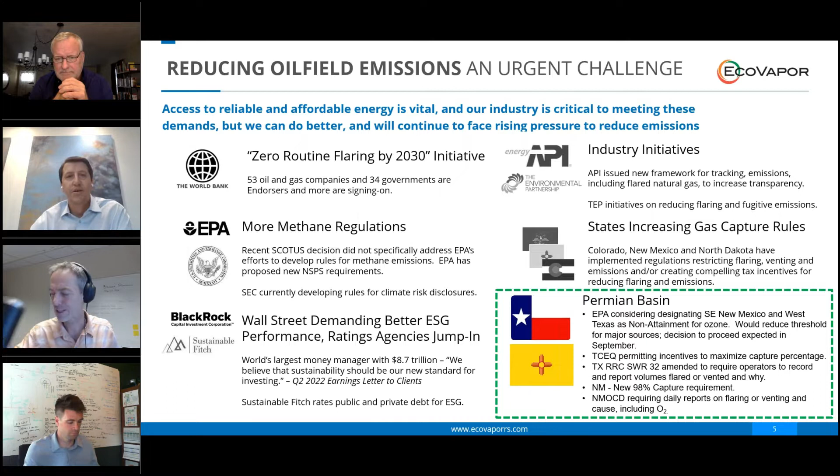So, before we jump into some of the more meaningful content today, just wanted to give a quick intro on who EcoVapor is in case some of you are new to us and what we do. As people are familiar with, the production process contributes a large source of our industry's emissions footprint, and that's really where EcoVapor focuses our time and energy. We provide solutions to help mitigate natural gas flaring and venting. We're founded on this notion of how do we eliminate waste from our operations? How do we eliminate the waste that can be turned into valuable production? And that's really where we spend our time.

So on the oil and gas side, we provide solutions that really enable this full recovery and sale of your vapor stream from a production site. We have solutions like oxygen removal, H2S removal, coming out with new solutions, also helping with tank pressure control, mobile solutions to help with those operations that aren't of the continuous nature. And we also have the ability to provide site assessments, helping you understand where that emissions footprint may be coming from. So really, all of these solutions focus on how we can eliminate these wasteful emissions and turn them into profitable production. We also recently entered the renewable natural gas space with gas upgrading solutions, and we're very excited about that. So that's a quick high level on us before we jump into the real content for today.

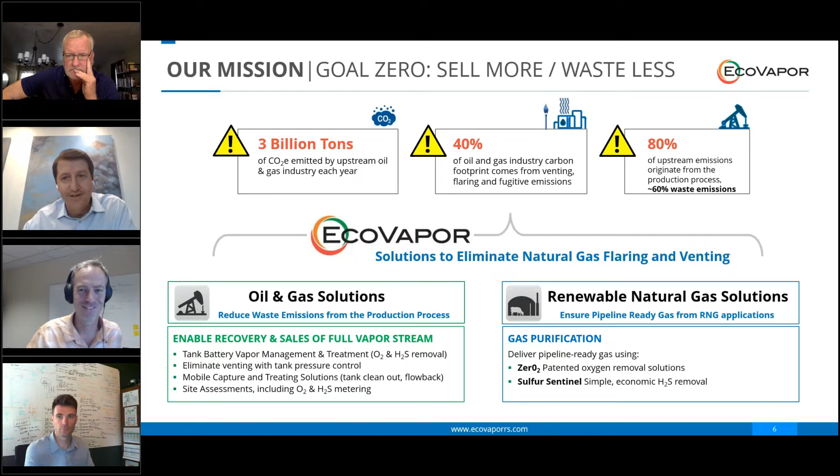As was mentioned earlier by James, we're privileged today to be joined by Pete from Bridger Photonics. So Pete, why don't I hand over to you for a quick introduction? Yeah, thanks. For those of you who don't know me, Pete Roos, the president and CEO of Bridger Photonics. Over the last 6 years we've developed gas mapping LiDAR with funding from the Department of Energy's advanced research arm, ARPA-E. And through that, we came up with gas mapping LiDAR.

And look, our goal here is to make the emissions reduction simple for the operators. Make it dead simple. So what we've done is we've come up with a sensor, and you can see a picture of it there. We stick it on the underside of an aircraft, in this case a strut.

We fly over oil and gas infrastructure throughout the entire natural gas value chain, from the production sites down gathering lines, boosting stations, transmission lines, compressor stations, all the way down to the city gates, and we're flying for utility companies to uncover their emissions as well. We hand our clients a map that pinpoints and images and quantifies every important emission in the infrastructure.

And so I would say, though, that the detection side, showing folks where the emissions are, I think the technologies, us and others out there, they exist now to solve this side of the problem. They exist today. The harder part is maybe more of what this talk is about, is mitigating those emissions, fixing the leaks. That's harder. So I'm here today to discuss a few case studies, but I'm also doing a good bit of learning today in this webinar.

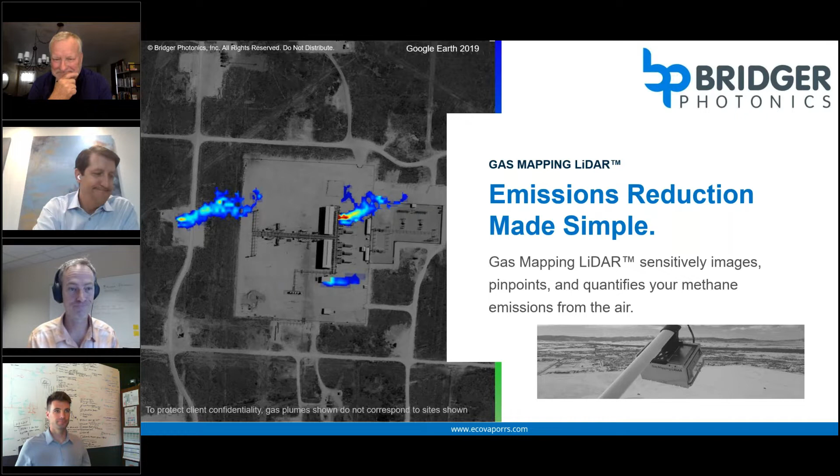Thanks, Pete. My name's Jeff, and of course the question today that we want to get into is the role or the significance of tanks in contributing to emissions from the upstream oil and gas industry. And one source, EPA developed several years ago, using emission factors, an estimate of the industry emissions by equipment source on site. And this chart on the left shows that. Based on the EPA data, this is 2019, which is the latest data published by the EPA.

And in their evaluation, pneumatic devices were the largest source of emissions in the industry at 37%, followed by flaring, and then followed by tanks. So tanks is the third largest source of emissions according to these figures. Now, emission factors, if you're not familiar, are an emission rate that is then multiplied by the frequency of an activity on a well site. So clearly these are estimates, they're not measured. These are not direct observations, these are estimates.

And the source that EPA used for developing these is shown at the lower right side of the chart. And of course, EPA is trying to find a way to quantify the magnitude of the issue, but also by having these types of emission factors, they're also able to evaluate changes that they might make in regulation that would impact favorably the emissions from the industry. So anyway, on this chart, based in 2019, tanks were the third largest.

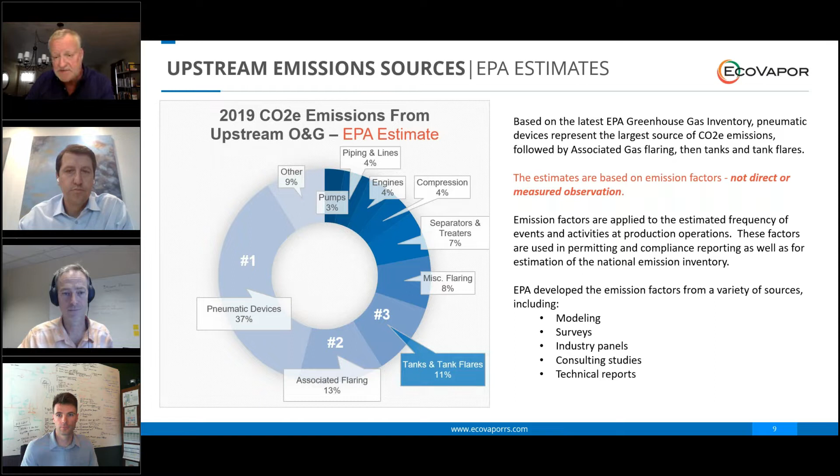There's another study that was done, the data's a little older, 2017 data, but it's from the Department of Energy, another study using the same greenhouse gas inventory database, and did look just at upstream flaring. And in terms of upstream flaring, about half of it, in terms of CO2e, was from associated gas flaring. And the tanks were the second largest source of flaring, about half the volume of associated flaring, from tank batteries. And then there's fracking and some other sources.

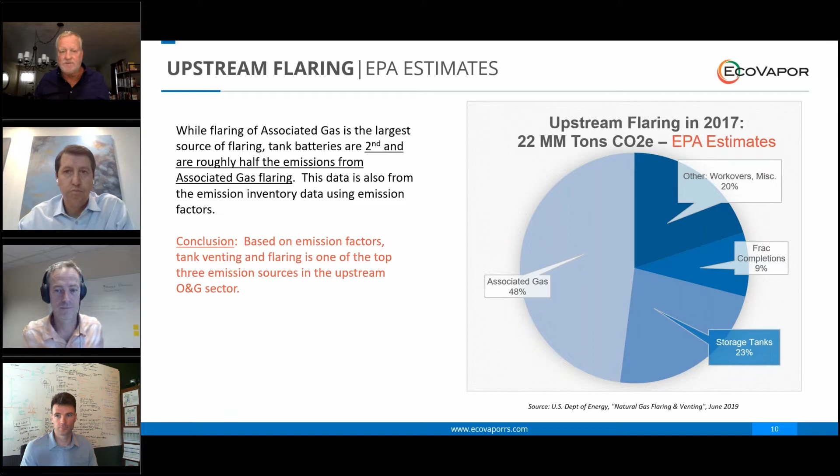But the point here is if we look at EPA's data based on emission factors, tanks fall into the top three sources of emissions from the upstream industry. And then there is direct measurement, which if we move forward, we want to compare what has actually been observed with the latest technology, such as Bridger Photonics. I'm going to pass this to Pete. There's several case studies, and Bridger was involved in several of them, and Pete can explain this certainly better than I can. Pete? Okay. Thanks, Jeff.

Yeah, so we're going to talk about 4 case studies. We were involved in the first 3, and then the last one I'll let Jason discuss, and that's Carbon Mapper that did that last case study. So this first one was conducted in Canada in 2019 by Matt Johnson's group at Carleton University. And so what they did was they flew us over oil and gas infrastructure production sites in British Columbia. They didn't even tell us they were assessing us.

We thought it was just a job for British Columbia, but it turned out to be valuable. They tested us in terms of our detection sensitivity and everything else, without us even knowing, which actually turned out to be a great thing. The results were consistent with what we're going to see in several case studies here. From what we found, the top three were tanks, flares, and compressors, and we find that almost universally through every basin we measure, not necessarily in that order. Sometimes tanks come up in number two or three, but they're always in the top three. The public information we show here has tanks as the top emitter in each case.

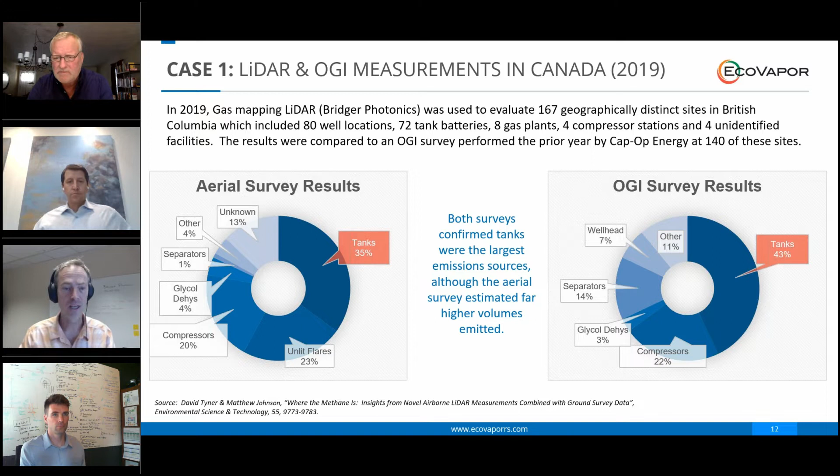Okay, let's look at the next slide. This was a CAMS survey - CAMS is a great organization, they were pretty early on. This started in 2019, and we ended up doing the study in early 2020. Same general results, and this is the largest study - I'll point out the last one was a pretty small sample size. This one started to get larger, over 5,000 pieces of equipment. Again, in this case we got tanks and compressors, but this time flares were swapped with separators. Same general result though - tanks are up there, and we find the emissions from tanks is a consistent theme here. This was in the Permian, I should say.

Then this was a great one, TRP Energy - they wanted to show transparency, so they published their results on what folks found. Again, small sample size for this one, conducted in 2020, 25 facilities that we surveyed. Due to the small sample size, it looks like tanks were even larger - 68%, combining tanks and tank flares, with flares separately having their own category. Small sample size, but again we see the same trend: tanks are a large component of the emissions, and I think that's the theme for today - through all of our case studies, tanks are a significant emission contributor for the equipment type.

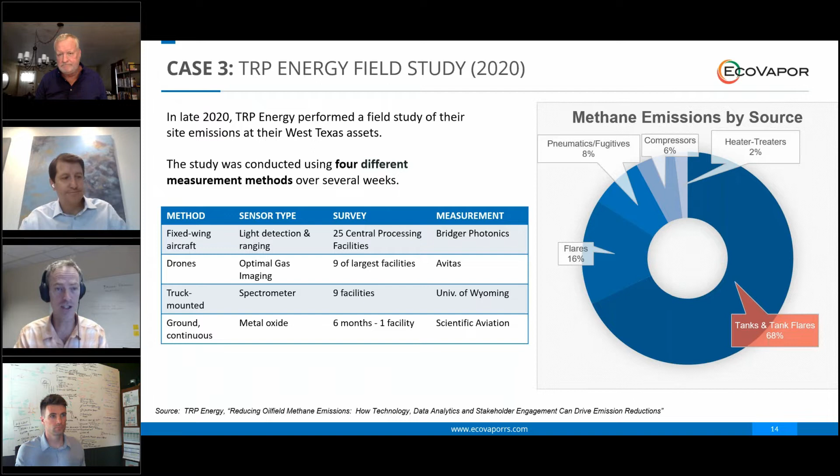All right, now I'll turn it over to Jason, and he'll handle the last case study, which we were not involved in.

Thanks, Pete. Appreciate that. Good insights there. A lot of good information.

In my previous life, we participated in that TRP study as well, and a lot of good information came out of that study.

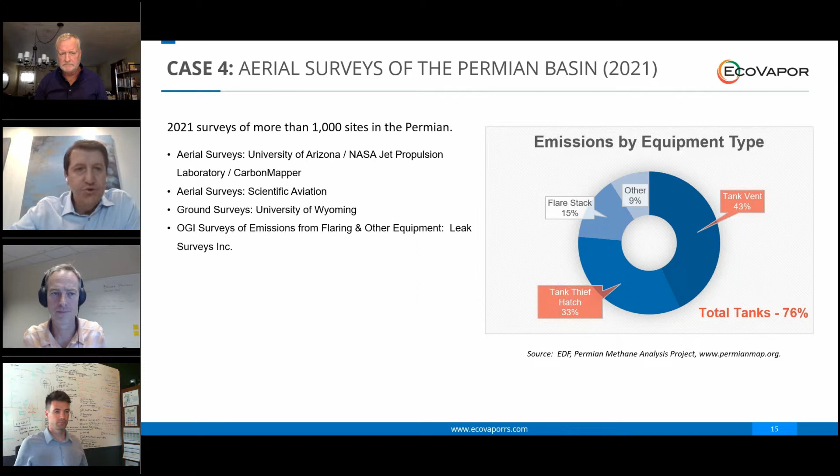So then as we move on to look at the aggregate here, we start looking at, okay, what are we finding? What is the summary, the comparison of findings, at least based on this handful of surveys that we've seen? I think there's a few things I would say here.

One is, of course, as an industry, we're still learning, right? We move more and more from modeling and calculating to measuring our emissions. And as we continue to learn and measure, that means we can focus our solutions where some of these greatest pain points are as well.

And of course, these large discrepancies can mean that operators may be spending their time fixing problems that aren't as large of a problem as we may perceive.

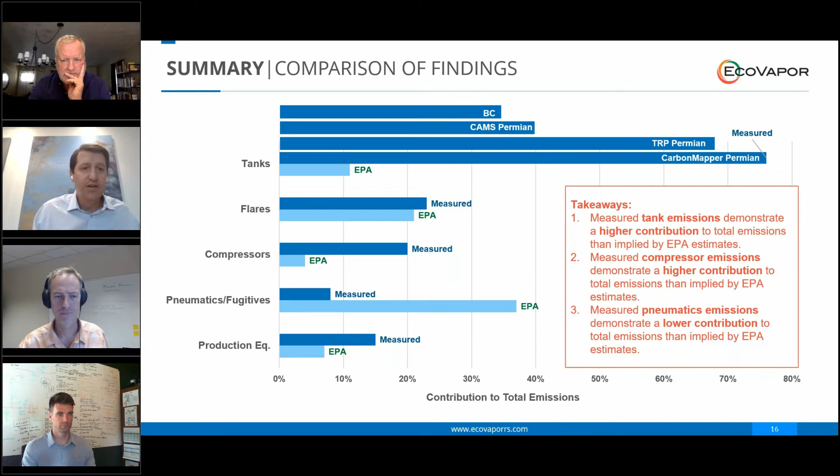So as we move on to a sampling of some comments that we picked up from these different studies that I think are worthwhile highlighting - one, we've hit on the consistency of tanks being such a significant volume of the emissions, but there are a few other comments worth highlighting.

So one being here that it didn't necessarily correlate with production volumes.

So whether it's high rate facilities or not, the results were pretty consistent in the fact that they were still a meaningful source of emissions. Another learning from these studies is that low oil rate facilities cannot be dismissed as negligible. The correlation can vary, but tanks continue to rank as one of the top one, two, or three sources in any of these studies, and even these low rate facilities can put off significant emissions.

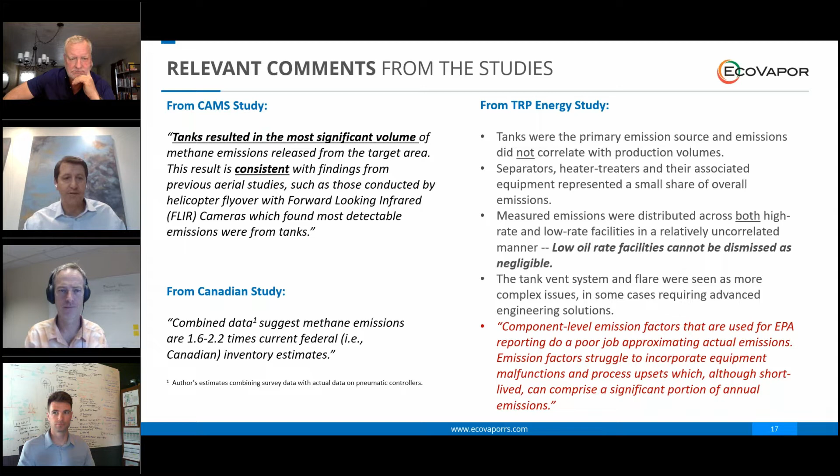When we look at why some of these emissions factors may be off, I think one thing we can all relate to is operations happen. You can't necessarily model what's going to happen in a given day. You can't model a malfunction or a process upset or other items that, even though short-lived, can make material impacts on all these data sources and on your day-to-day management of your emissions footprint. Some very interesting tidbits came out from these studies.

Moving on, we can briefly touch on what are the regulatory implications. First off, these are complicated issues that can vary greatly by state, by region, wherever you may be. And it's important to state that we are by no stretch of the imagination experts on this topic. But with that said, there are a few things worth highlighting.

One is that, pretty consistently, if you look at some of the EPA proposed regulations, tank flaring is generally still permitted as an acceptable emissions control device. That's pretty consistent no matter where you're looking. Of course, there are non-attainment zones being contemplated, including in West Texas, Southeast New Mexico, and already in place in places like Colorado. But still, generally speaking, tank flaring is an acceptable emissions control device.

Looking at specifics per state, in New Mexico you're starting to see that you have to provide notification and justification for flaring over 50 MCF per day at this point, which is kind of on the leading edge of where states are headed. In Colorado, as mentioned, you have the ozone non-attainment zones, which mean you have to limit major sources to 25 tons per year. This can also mean we have to keep track of emissions even from places like the tanks or the tank flares.

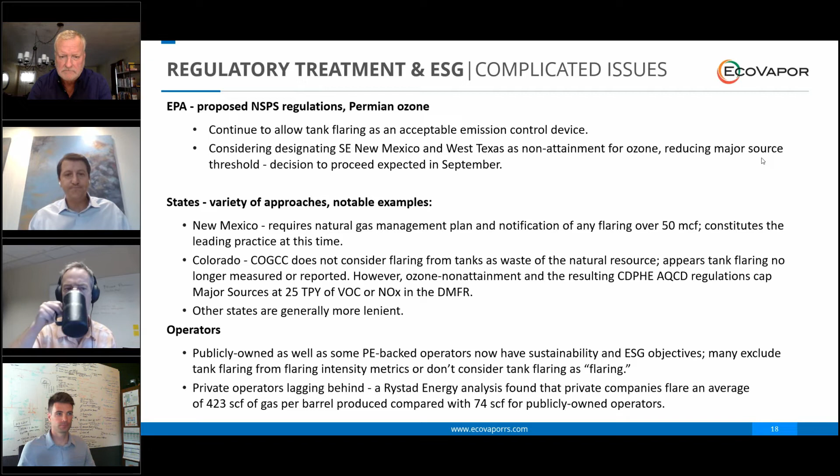So just to conclude here in terms of what the data is showing, whether you're looking at measured emissions or modeled emissions, it's pretty clear that tanks play a significant role, which is exactly why we titled this presentation 'Road to Net Zero Goes Through Your Tanks.' Our hypothesis, our thesis, is that you cannot get there without addressing this problem. The more time and energy we can focus on these problems, the better off we all can be. Of course, there are other conclusions.

Flares, compressors, very meaningful sources, and of course areas of focus. And we've seen a lot of focus coming in through time here. And tanks can be a relatively special case here, as is noted, because there isn't necessarily a correlation to your production volumes, and they can sometimes be a challenging problem to solve.

But the other implication that is also worth highlighting here while we're talking about conclusions is that not only are these representing a significant environmental opportunity, these also represent a significant financial opportunity. A lot of times this tank vapor is the richest gas on your production site. And so the ability to capture, the ability to purify this gas, the ability to make sure that this gas is monetizable, if that's a word, or sellable, is hugely important.

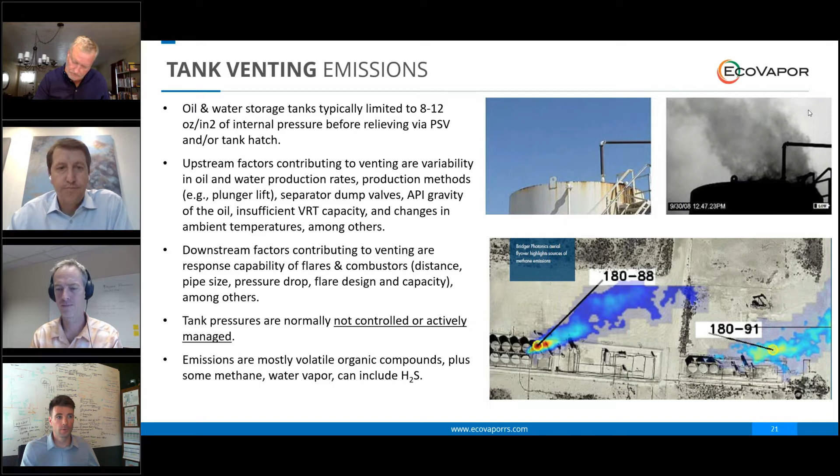Let's move on to emissions associated with combustion or flaring, that method of controlling tank emissions. So I'd say VRTs might be a good place to start. They definitely do help reduce the vapor volumes at the tank battery. However, a lot of times, almost always, performance is less than advertised. And it's really not the operator's fault.

It's because the simulation software that they're using to design their facilities, like HYSYS or ProMax, they assume perfect separation. So what I'm saying is that these programs assume that the second your water gets to 212 Fahrenheit, it's all steam, but it's not. It takes time for that phase change to occur where it transitions from liquid to gas. And the same is true for pressure-driven phase change phenomena.

So this has caught some off guard because their simulation software will tell them that they can assume 90+% capture efficiency, where real life measurements actually indicate it's more like 67 to 70%. So you can end up flaring or combusting more vapor than you anticipated in the first place, really through no fault of your own. And that gas that isn't captured, those higher than anticipated volumes, are typically flared or combusted.

And that's due to air contamination, specifically O2, and that prevents midstream gas gathering pipelines from accepting it because oxygen, A, disrupts the amine treatment process in gas plants, and B, it corrodes their asset, it rusts their pipe, and nobody likes pipeline leaks. So gas blankets are another method to combat exactly that, and they work great when they work. But it's pretty frustrating when they don't, and that can be more often than one might anticipate.

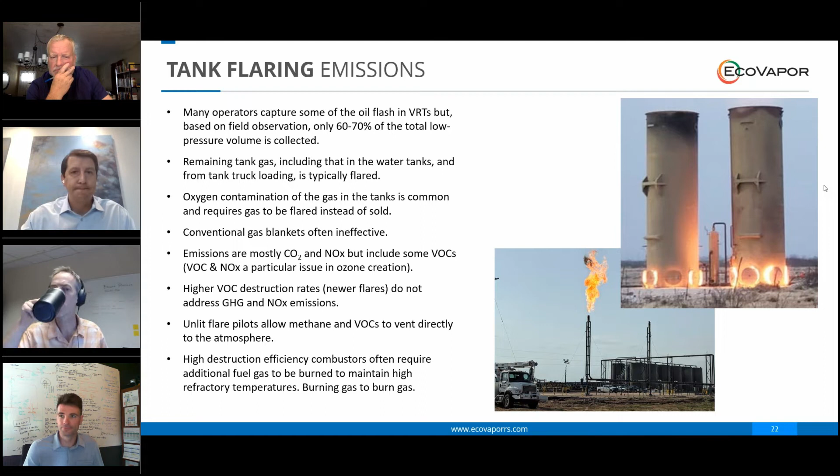And I think it's also important just to talk about order of magnitude. And let's just look at the impact of tank vapor recovery on a per unit basis before we back it up a little bit wider. So EcoVapor's ZerO2 E300 product, that's the most popular product that operators have adopted. It can process 300,000 standard cubic feet per day of gas.

And in tank vapor applications, that gas quality typically ranges from about 2,000 BTU per cubic foot to, we've got, I think, 5 or 6 different samples that are over 3,400 BTU per SCF. So let's just take the lower average of 2,500 BTU gas. And to get a sense for the chemical energy equivalent on that, that's over 9 megawatts of power. That's more horsepower than the most powerful locomotive ever built. Each one.

There's a lot of energy that is going up in literally smoke right now that could be recovered for beneficial use. And on a CO2 equivalent basis, each of those E300s has the capacity to remove about 3,500 cars off the road. So let's just take a step back for a second and look at the overall capacity of EcoVapor's deployed fleet in North America.

That includes the E100 with 100 MCF capacity, the E300, the E1200. Soon we'll be releasing new models. But just from a current deployment standpoint, that footprint has grown in the past couple of years. We're nearing 200 units deployed in total today. That number continues to grow every week. But right now, today, we have the capacity to recover the energy required to heat over 900,000 homes.

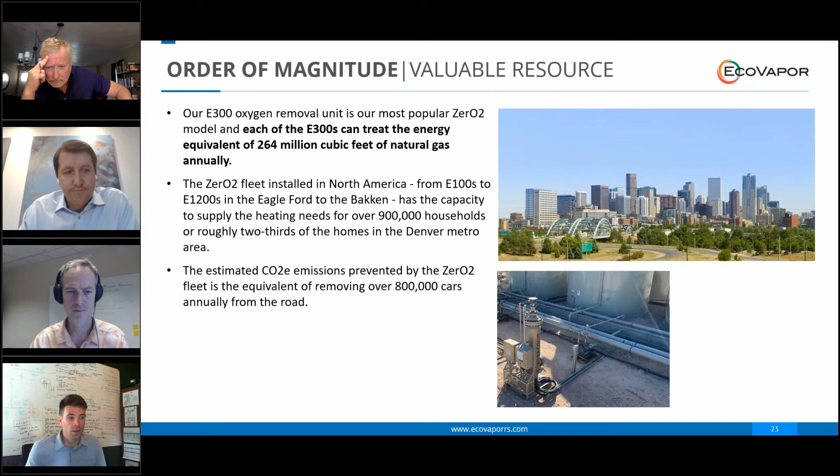And with that, I'd like to pass it back to Jason. Hey, thanks, Hans. Appreciate it.

But before we open up for Q&A today, we've identified problems, we've identified sources of problems, we've even identified some of the causes of some of these sources of the problems. But I think it's always worthwhile to hit on some solutions. So if we're talking about tank venting and tank flaring being the core problem, let's look at a couple of solutions here. As Hans just talked about, these tanks are responding to normal changes and pressure swings based upon the conditions of operations around them.

So one solution that is employed in some cases, and more and more widely, is let's actively manage these tank pressures. It is helpful to eliminate these venting emissions, which of course are an order of magnitude more impactful than even flaring emissions can be. And then on the flaring side, we still send a lot of gas. We still waste a lot of gas and literally burn this gas off into the environment.

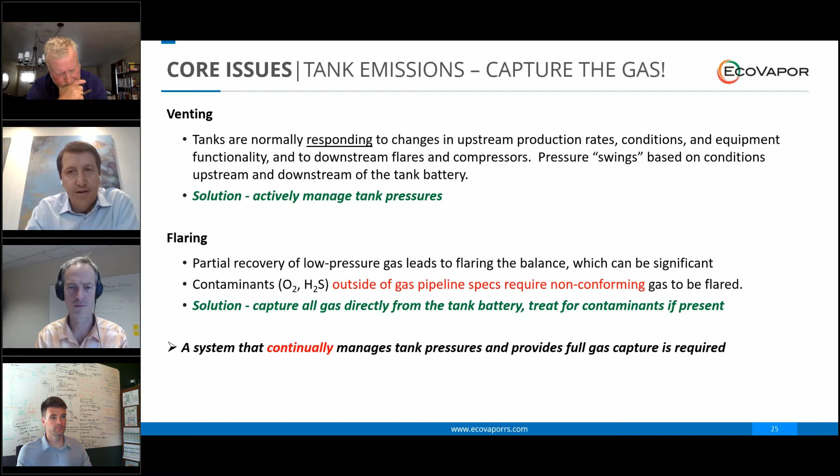So the obvious solution here is let's deploy all the solutions we can to ensure that we are capturing this gas, right? Let's eliminate the waste that we are continually sending via the flare. So utilizing different equipment, different technologies to help capture all of this gas directly from these tank batteries, and then the ability to treat this gas for contaminants to ensure that it is pipeline ready, is of course a good solution to mitigate some of these large problems.

And then briefly, to wrap up here, just a quick look at what's been happening at EcoVapor lately. We continue to focus on and innovate solutions that are focused entirely upon how we capture 100% of this vapor stream from your tanks, whether it be oxygen, whether it be H2S, a variety of solutions that we have in the field today, including that we're continuing to step down these units to handle more and more of these marginally producing wells as we continue to reduce the footprint of our operation.

And then I'd also highlight one other item to be on the lookout for as we move forward. We have recently released what we call our vapor management system, or our VMS. It's a new product that is coming out. It is currently being piloted with two of our customers in the Rocky Mountain region. And what we're trying to accomplish here is twofold, really.

We're trying to look at both venting and flaring volumes. And what we're trying to do here is, one, to help you actively manage these tank pressures, help you actively capture these vapor volumes, but then also enable the decontamination of any oxygen present in these gas streams to ensure that we can sell all of this gas.